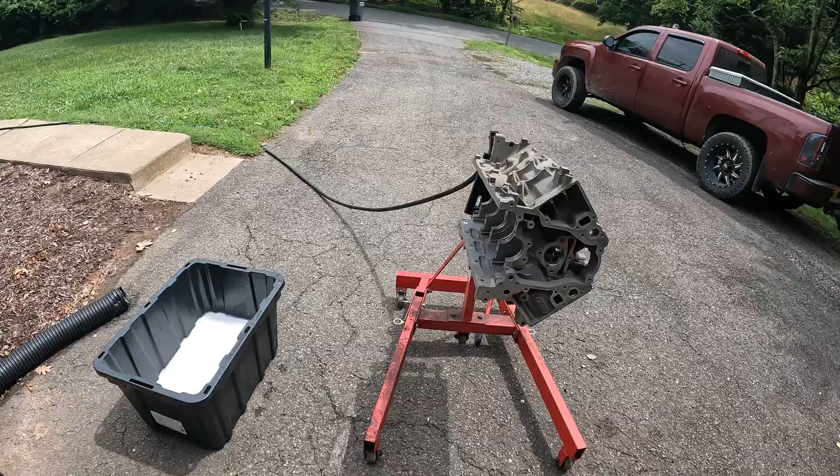So for starters, I have the block out here. I have a garden hose. In this tub I have water and a mix of Simple Green. I've already dropped the main caps in here, and like most of you, I don't have a big parts washer or something that I can just put the whole block into and turn it on and walk away. So I'm going to be showing you a cheap and easy way that you can do a proper cleanup and block prep on all of your parts, not just the block, on your build at home.

So like I said, we got the engine out here on the stand, got a hose ready, got a mixture of some Simple Green and some water. And for our cleaning, we're going to be using this right here. This is a Moroso 61820. This is a big brush kit, so I'm gonna pull them out of here. As you can see, we have a bunch of different size brushes. So we can scrub out all the oil galleys, we can clean the bores up and get all of the honing grit out of them. We can get everything nice and clean and ready to assemble.

Okay, so I got all the brushes out of the box here. Of course, you got some stickers. You got to have a nice sticker stash. You got to represent what you're buying. That's what everybody buys it for, right? We buy the stickers and we just get whatever we order, you know.

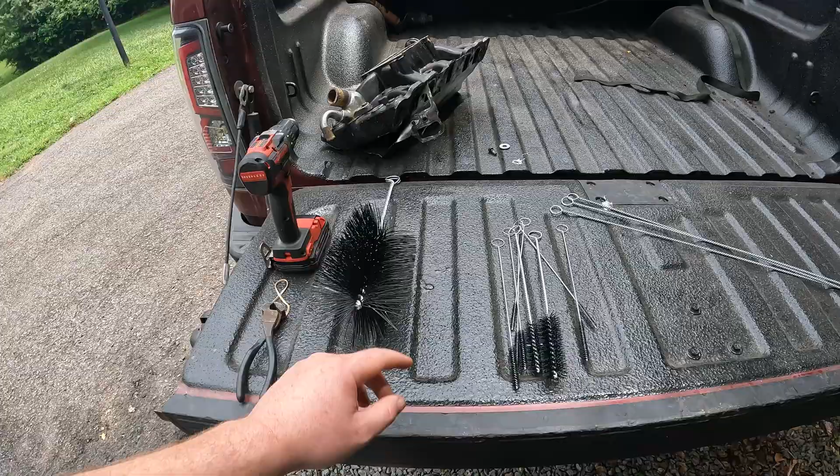So we have our bore brush right here. We have a bunch of shorter brushes, various sizes, so you can clean out all those small galleys. We have these nice long ones here, and we're definitely gonna have to use some of these because remember, we have that long main oil rifle that runs from front to back in the block, around the cam, and from the oil pump.

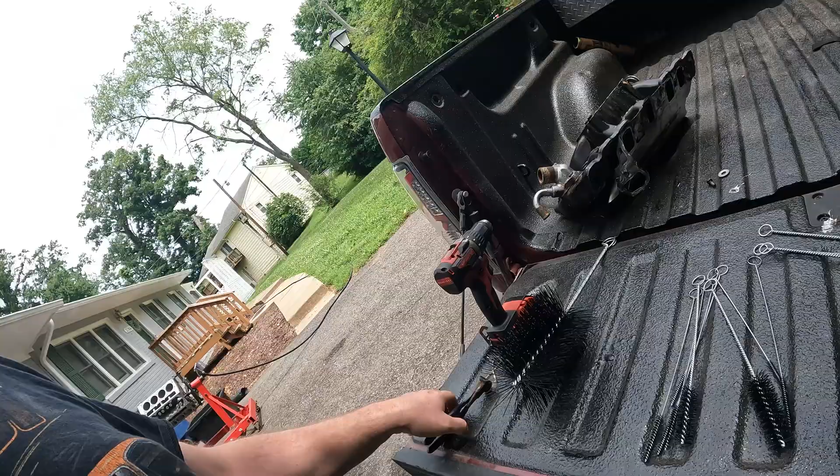And a little tip that I'm gonna show you here is these have a little finger ring end on them. If you want to make quicker work of it and maybe be a little more thorough with your cleaning, we got a drill right here, a pair of pliers, and I figure you can figure out what we're gonna do here. We're gonna cut those ring ends off. We can chuck that up in the drill and spin those brushes as we're running them in and out of the bores and all the oil drillings in the block here. So let's get started.

All right, so for starters, we're just gonna give the block a good rinse down. I've got the brushes over there. I got the ends cut off of them and we're ready to start cleaning. As you can see from last time when we were doing some modifying with all the oil drainage and the feeds, we have some chips laying down in there. So we're going to start with giving it a good rinse off, and then we'll hit it with the brushes and go from there. So ready.

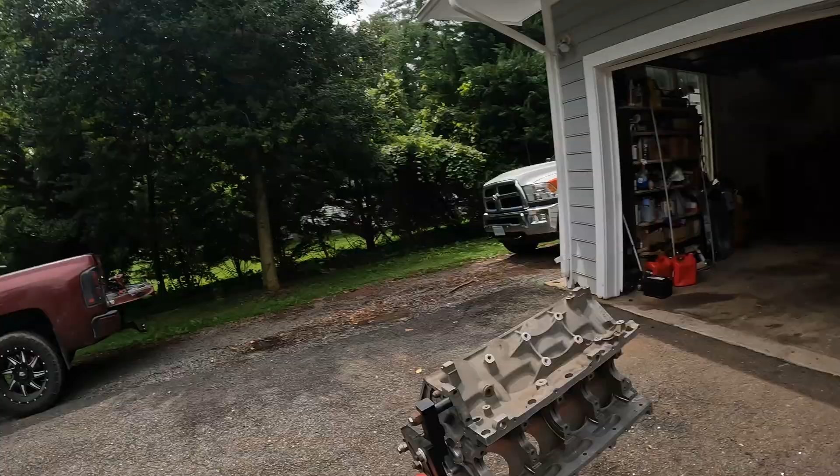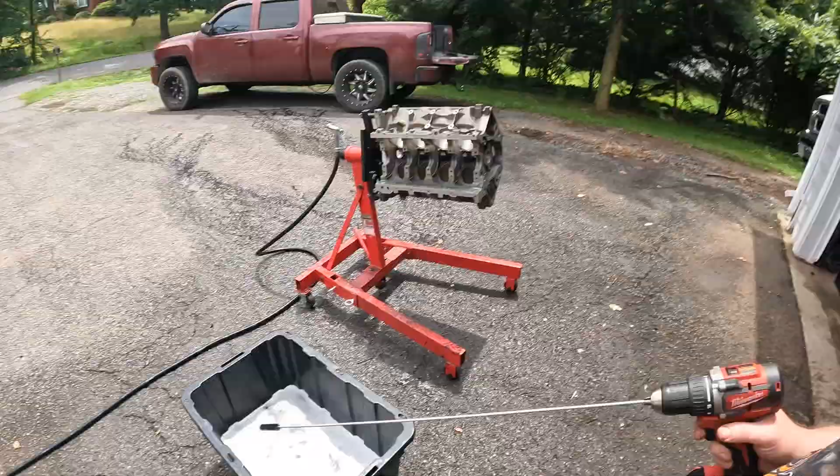All right, now we got a basic rinse down, got some of the big stuff out of there. We're going to start running the drill and the brush through it, and here's our setup. Looks kind of goofy, a little long, but it'll work great. So we're going to get some soap going on this thing, get it turned up, and start going through the drillings here.

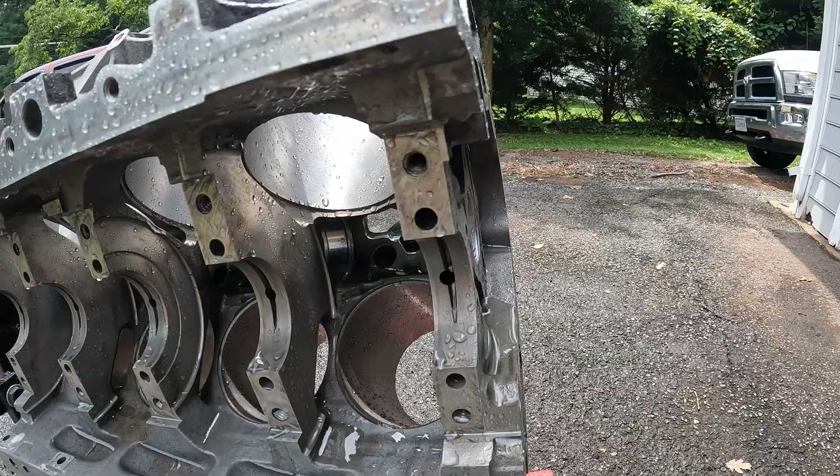You can see we've actually started knocking some dirt loose in there. So I'll put a little bit of a time lapse in here, keep doing that, and you can see what we're doing. And I'll get some more Simple Green in there soaking. Every hole we're gonna go over a few times to make sure we're knocking anything loose, especially when we go through these oil feeds to the mains. We could have had a little bit of dirt get in right there behind the cam bearings.

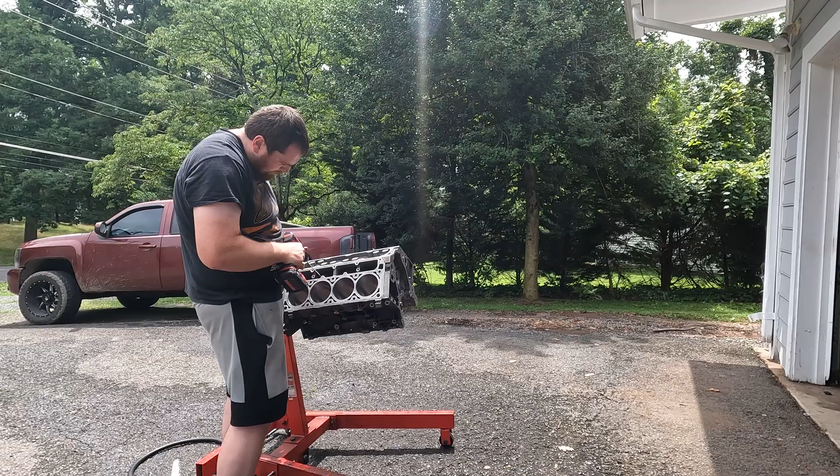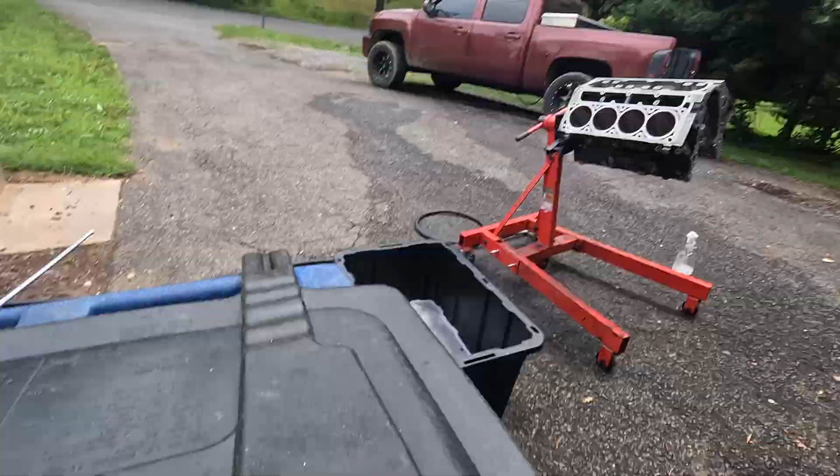Alrighty, so I've done a bunch of brushing as you've seen in the time lapse. So we've got everything fairly clean now. I'm going to give it a rinse and I'm going to look it over real good. One thing I am going to do too is I'm going to tilt this thing over on either side, and I'm going to show you how to make a quick thread chaser for the head bolts, because if you're not aware, you can even see some of it down in the hole maybe.

There is like a sealant slash Loctite that they put on the head bolts from the factory on these, and it will build up and kind of clog the head bolt hole, and it gums up the threads. So when you are trying to torque your head bolts, you can get an inaccurate reading, and sometimes that can actually make such a seal that you'll hear of people talking about the block popping when they're torquing those bolts. It's more than likely because they didn't get those holes cleaned out enough.

So I'm going to show you how to take an old head bolt and just cut some slots down the threads and kind of make a homemade thread chaser. We're going to clean all that out, flush them out really good, and clean all the head bolt holes up. I've already ran a brush through the main bolt holes, and I know those were nice and clean. They don't really put a sealer or anything on those, so I know those are nice and clean, and I've ran all the bolts in and out by hand, so I know that they're good and clean.

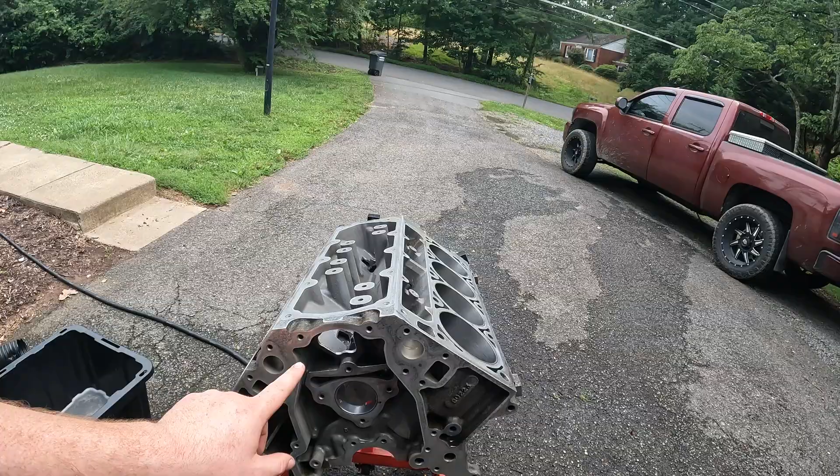If you have any bolt holes that need chased or cleaned, now is the time for you to go ahead and run a thread chaser or a tap through everything, clean them all up. This one came apart really good, everything's clean, so I should be pretty good once I just flush it with some water and some air again.

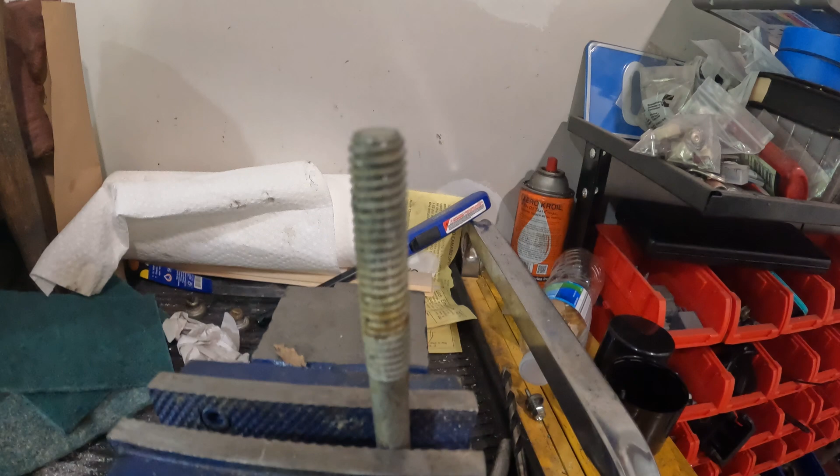Alrighty here guys, I got a head bolt stuck up in the vise here. You can kind of see some of that slimy stuff, that goop that's on the threads. That's some of that thread sealant I'm talking about, and you know, it mixes with the coolant and everything. We can take it out. So what we're gonna do, got the old trusty Milwaukee here with a cutoff wheel, and we're going to cut probably just two of them. We're gonna go this way up the threads and just cut a slot.

And what that's gonna do is, as we're running down through there, just think of it like a tap where you have the slots cut in between them. That's all we're doing, is making a thread chaser with this and just allowing the edge of those threads to kind of cut and clean all of the sealant and Loctite out of those bolt holes. So we're gonna go ahead and do that real quick, and we'll go over and get the block cleaned up the rest of the way.

Alrighty, so I have the slots cut in it. I just cut two. Try and cut it the full length of the thread so you make sure that you get everything. Now be careful. Yes, I'm going to use an impact, but I'm going to run it on low. Don't just try and burn this thing down through there, because you can damage the threads if you're being too aggressive with it. So just be light.

If you don't feel safe using this or an impact of some kind, just do it by hand, but make sure you run it all the way down. Now don't try and burn the thing in the bottom, because you will bottom the hole out and you can damage the block, pull threads out of it, whatever.

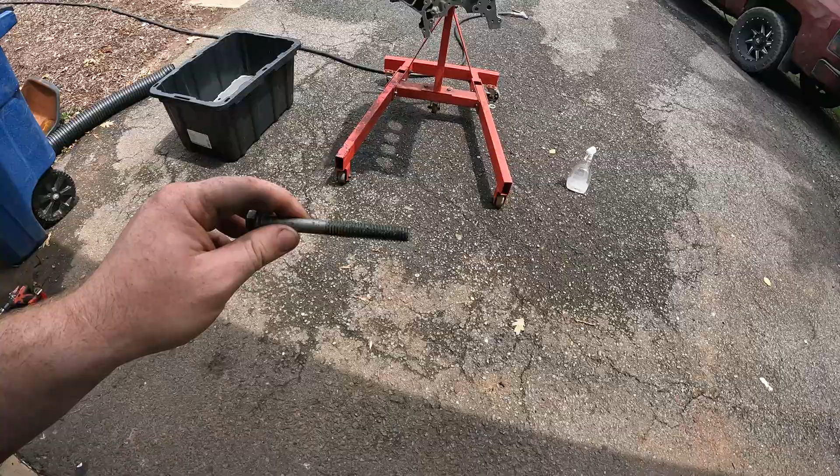Okay, so you can see some of the dirt and junk that comes out of those holes, and so just make sure you get all those nice and clean. We're going to give this thing a good rinse job afterwards, and we'll be all good to go.

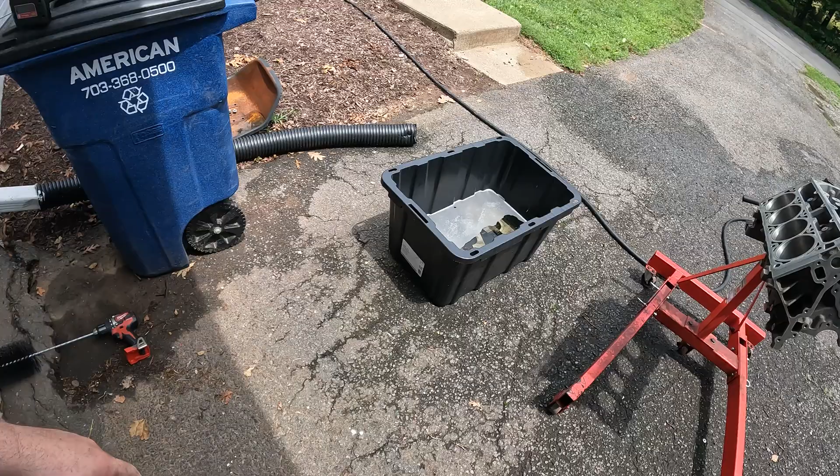And so just for FYI, you might have heard it kind of bumping on the bottom, but I only have this thing, I don't know if you can see the light, set on like the super low, and that runs it down to like 5-10 foot-pounds at best, and it'll only hit 10 if you sit there and like bump it. As soon as it hit and started jiggling, I stopped, back it up, run it in again.

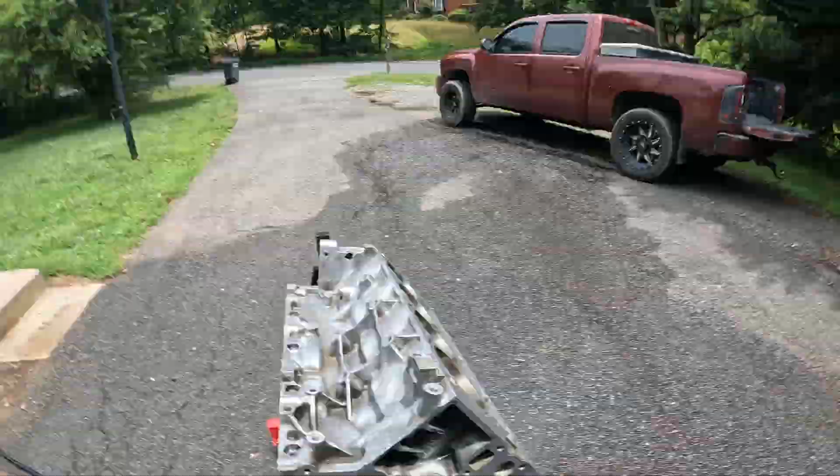Alrighty, so sorry for the noise. That's what I got to work with. It's noisy, but I decided to go ahead and do some wire wheeling and clean this off, because in the next video we're going to be painting this engine, and hopefully it turns out really good. I hope y'all like it. I'll give you a little bit of a hint, but we're going to be kind of keeping the theme going here.

So getting this thing blow dried, you can already see we're starting to get a little bit of flash rust in there. That's not that big of a deal. That stuff's so light, if you just wipe it with a rag, it'll come out.

Try to do this on a cool day if possible, and I actually recommend you not use hot water. Reason being, it dries quicker. That block will soak up all that heat. It'll dry quick. You'll get flash rust almost instantly. As you can see, I'm sweating. It's about 90 and it's pretty humid today, but we got to do what we got to do.

All right, we got the rods and the main caps. I already sent them through the bath, got them all cleaned up. I've cleaned the bolts up. We're not going to be reusing those. I got new ones, but I am going to be using them at least for the part where we're going to install the mains, check all the main clearances and all that stuff. I also have new rod bolts. They're just stock replacements for everything.

I didn't really feel the need for this engine to spend the money on ARPs. If I was spending the money on ARP rod bolts, I'd probably just put an aftermarket rod in it, because by the time you put a rod bolt in it and have them resized, you could have bought aftermarket rods. We really are not going to a power level that's going to necessitate main studs from ARP or anything like that.

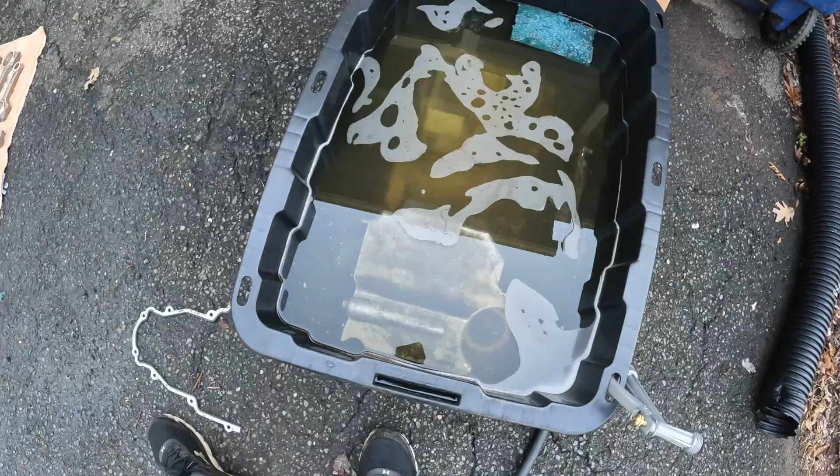The oil pan, I got the windage tray, I got the front cover, I got all that kind of stuff in there. Valve covers, rockers, all in there, going for a bath. I won't bore you much with that. I'm gonna go through and just get it scrubbed up, clean, and then we'll be ready to go with assembly on parts.

The crank is in here in the bag, so it's already pretty clean. I'm not too concerned with it. I am going to just take some of those brushes that I got, and I might show that real quick when we're getting ready to set our clearances and actually install it for good.

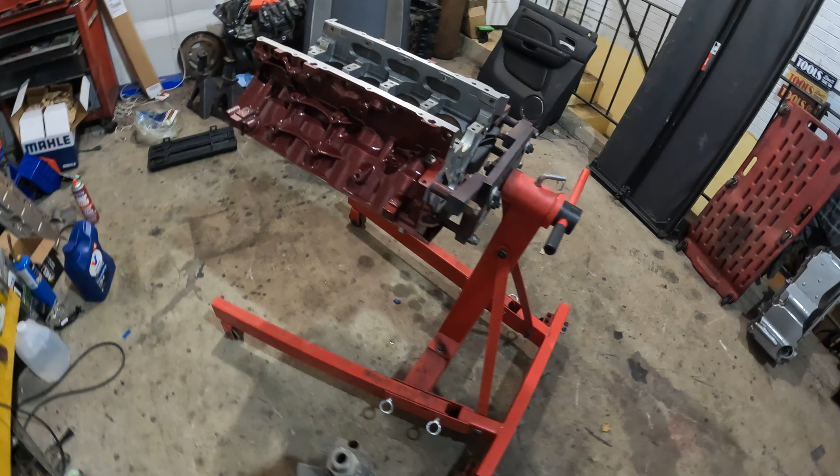So what I've done already off camera, as you can see, this looks a little bit different than when you saw it last time. I got everything painted up nice and pretty. After I was done cleaning it in the last video, I tried scuffing and doing some cleaning on it, and I just wasn't happy with how it was coming out.

I figured, hey, it's out, and I feel like I did a poor quality job if I just put it in as it was with dirty grungy aluminum, and I wanted to clean all the corrosion off of it. It just wasn't turning out very good. So what I opted to do was go ahead and sandblast the outside of it and clean all the parts up. So we did the valve covers, valley pan, oil pan, the heads, the block. Most of the big parts are done.

So I went ahead and sandblasted, and unfortunately that led to me having to re-clean the block again, as I showed you before, but at least I know it's nice and clean this time. It's been cleaned twice, so I just wanted to make sure we didn't get any sand from the sandblasting or dirt or anything like that back in it. So I did a full clean job just to be safe. So now this is what we're left with.

If you can't tell, this is the same color as the truck. I had some paint left over from some previous repairs on it, so I had the same red and I had some clear coat left over, and I chose this gray on the oil pan. This is on the oil pan, on the valley cover and the valve covers.

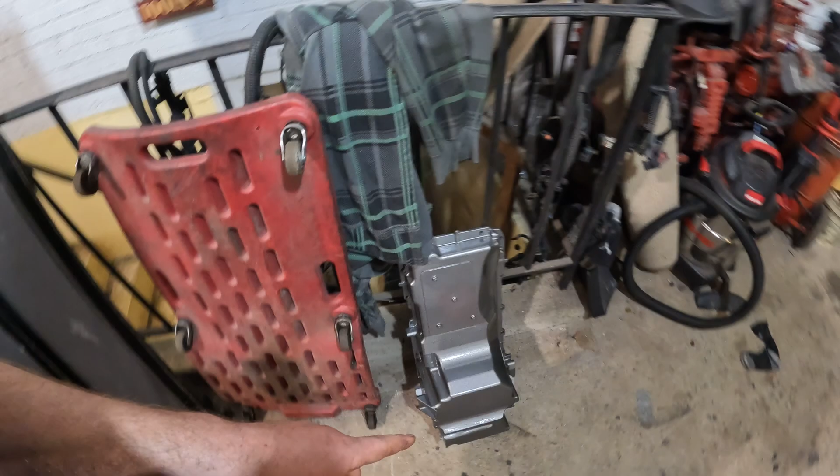So I went ahead and went with this color, and everything is primered, painted, and clear coated, all with automotive grade stuff. So this should last forever, should last good. Hopefully we don't have any issues with it like peeling or cracking from the heat later.

Some of the guys on Roadkill, Dulcich and Freiburger, swear by this stuff. Doing automotive paint, it's my first time doing it. I've done a couple rattle can jobs with some Duplicolor engine paint, stuff like that. Doesn't seem to last the best, so we're gonna find out if this lasts any better, stays shiny, looking good. So that's that. In this part, we're going to be getting the bottom end set up.

So I've done a lot of painful stuff kind of off camera here. Things that I'm not really gonna get into too much just because I didn't have the time. I was doing a little here, a little there, and it was really sporadic. So we went ahead, we measured the cylinders and made sure that they're pretty square. I got a couple ten-thousandths variance. They're all pretty straight. The hone job is pretty good on it. So I got that all checked, measured the skirts, pulled all the rings off the pistons, measured the ring gaps, made sure we're all good on that.

I just set the crank in, and I know I'm going to catch some flack for this, but I just Plastigauged it because I wasn't super confident in my micrometer setup that I have right now, getting the dial bore gauge straightened out. So I didn't feel like dealing with all that. This is a stock crank that was polished, and I just put stock replacement bearings back in it, so it shouldn't be that far off, and it's not.

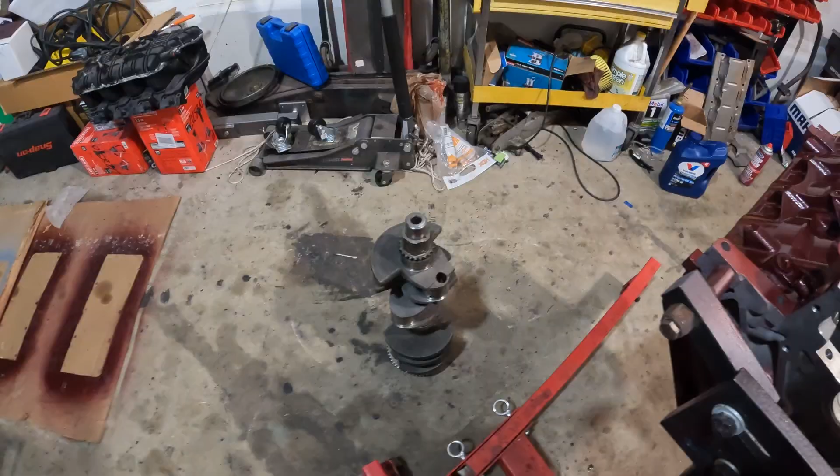We're about 2 thousandths on the mains. The front two are a little tighter, like 1.8 or just a tick under 2. So I'm pretty happy with that. I figured this thing was going to be a little looser than that, but I'm not mad about it. The crank was polished and stuff, so went ahead and checked that. Got it all lubed up.

We're going to drop the crank in, torque the main caps, we're going to put new bolts in it before we torque it, and then we're going to start assembling rods and pistons, get those in, check the rod bearing clearances, and then we're going to keep going together with it. So this video is mainly just going to be some bottom end assembly and sticking the cam in, a few things like that. So we're going to get this crank stuck in there, and I've been wanting to try one of these. So now you see it like this.

So got the crank in. Had to kind of take a pause because for some reason I was struggling to get one of the caps squared and set in there. Kept binding up on me, so we just had to take a pause on it and take it back apart, figure all that out. I think I just wasn't getting it to seat right in the block. I always tap them into place and stuff, but for some reason number 4 was just struggling seating itself in there.

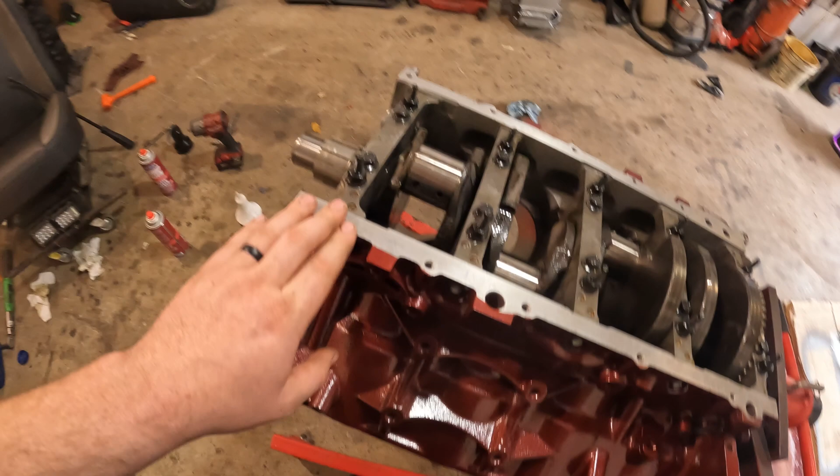So anyway, we got it in here, got the caps all torqued, got the side bolts in and torqued. I put a little bit of sealant on those. These are new main bolts. These are Summit's, they're GM replacement bolts. So I got them in there.

Also when you set these in, make sure that you take a dead blow or rubber mallet or whatever and tap the crank forward and back and get your thrust seated properly before you go ahead and torque this one. I already went ahead and checked. We got 4 thousandths end play, so we're perfect on that. So now we're going to get on to building rods and pistons and getting those installed. As you can see, once you got it all assembled, it should spin nice and easy and free. So on to the next thing.

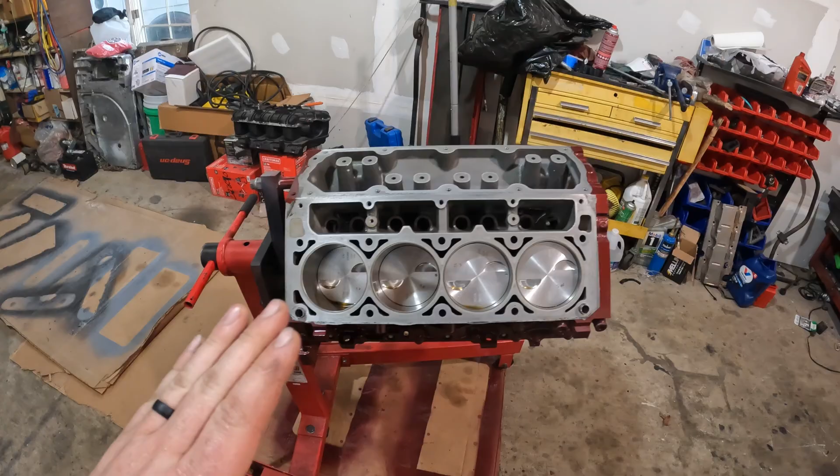All right, so in the last part, we got the bottom end together. All rods and pistons are in, bearings are all checked, crank's in, everything rotates nice and free. We checked the ring gaps, checked the bearing clearances, everything's good. So next part, we're going to be getting into a little bit of the meat and potatoes of this video, and that is camshaft, and then we'll be getting into cylinder heads and the valve train setup, because that's where we're going to make some power with this thing.

Not going to set any records really, but that's how we're going to bump this thing up a little bit from a stock 6.2 to something that's going to make a little more power. So let's get started. So here's a few of the parts we're going to be starting with. I have a phaser limiter we need to install. I'll go over that. New cam retainer plate.

Always replace these. They got a seal in them. That seals that front main oil galley right here. So make sure you replace that, because if that gasket's leaking, you're going to be oozing oil. So that needs to seal. I'm also going to modify this a little bit by drilling a pinhole in the one side here to add a little bit of oiling for our timing chain.

Reason I'm doing that, and the reason I think that you should do that, is we are running higher spring pressures, we're running a faster ramp and a higher lift on the cam. There's more load on the timing chain because it has to overcome all that, and we are going to be putting more tension on the chain. Being that I am keeping the VVT in this engine, obviously, since I said about a phaser limiter, we are limited to running just a stock single row chain. We can't upgrade to, say, an aftermarket double roller or anything like that.

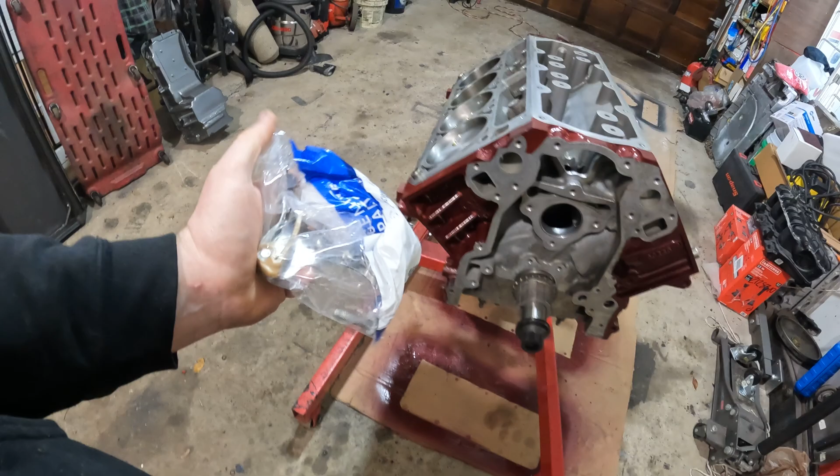Also, I feel that you should probably keep the stock style leaf spring tensioner if you're running VVT. I'm not saying that you have to, but I feel like you should. GM did it for a reason, and I'm not trying to be one of those guys that think that the factory did everything the best, because there's plenty of things they could improve on.

But the reason that I say that is when we're targeting our cam movement with the VVT, a little bit of slack in that chain, and I know it's not much, but you can get a degree or two of deflection back and forth on that chain and kind of make the VVT hunt, I think. So I feel like you should keep the stock style tensioner and not go to like the LS2, LS3 style little block in here, because that'll still let that chain slap a little bit. This will keep a little more tension on it and not let the chain wander around as much.

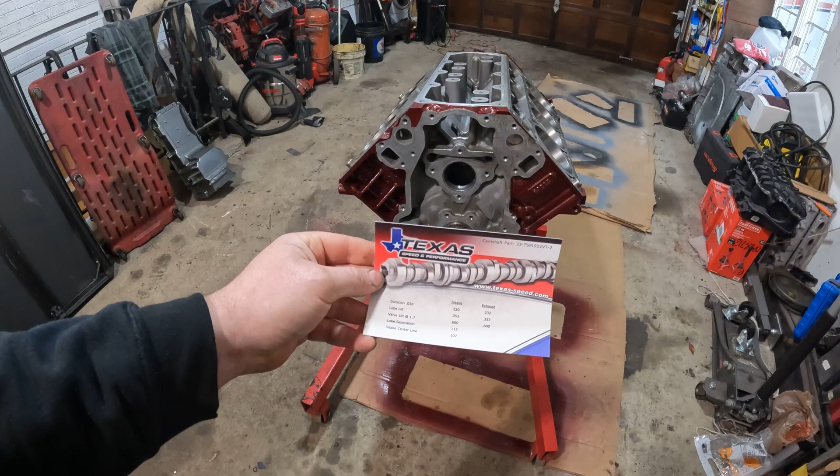So anyway, that's that. And obviously, like I said, I got a new chain, a new GM replacement, and I'm going to be replacing the cam bolt just to make sure that everything's working right with our cam phaser. And now I won't hold you any longer, and I got the cam card out, and we'll show you what we're putting in this thing. It is a Texas Speed cam, and like I said, this is a VVT cam, so this is their L92 VVT stage 2 camshaft.

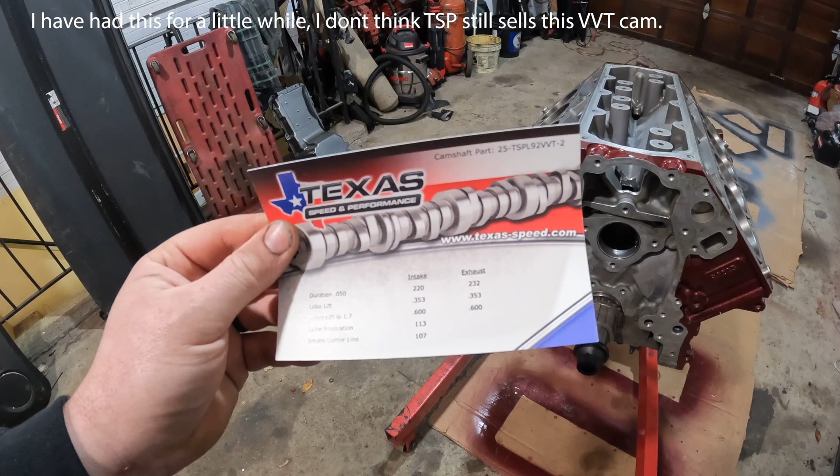So it is a 220/232 at .050 duration, and .600 lift at the valve, 113 LSA, and a 107 intake centerline. So I'm going to talk about that a little bit here, and problems that I have heard of and seen people have issues with when they deal with VVT, and they're like, I'll just delete it.

Without getting too in-depth into it, your cam timing makes a big difference on where your power band is. In general, I'm not saying this is always the case, you can go too far, but in general, the more you advance the camshaft, meaning the sooner that you close the intake valve so you capture more compression, the more low-end torque you will have.

Now you can't go too far with that and go beyond that point that you're making any more low-end, but then as RPM comes up and you're trying to make more top-end, shift through the mid-range, you can retard the camshaft a little bit and make it meet the needs of the engine better. So it gives you a little bit broader power band, and the reason I'm doing that is I'm trying to retain as much low-end torque or gain as much low-end torque over the 5.3 as I can with this 6.2. That's why I went fairly mild on the camshaft. I'm kind of riding the edge of what I would put in something on this kind of application.

Trying to make it have a good overall power band, pull decent on the top end, but still have good drivability, good low end mannerisms, good torque, not need a big stall converter, stuff like that.

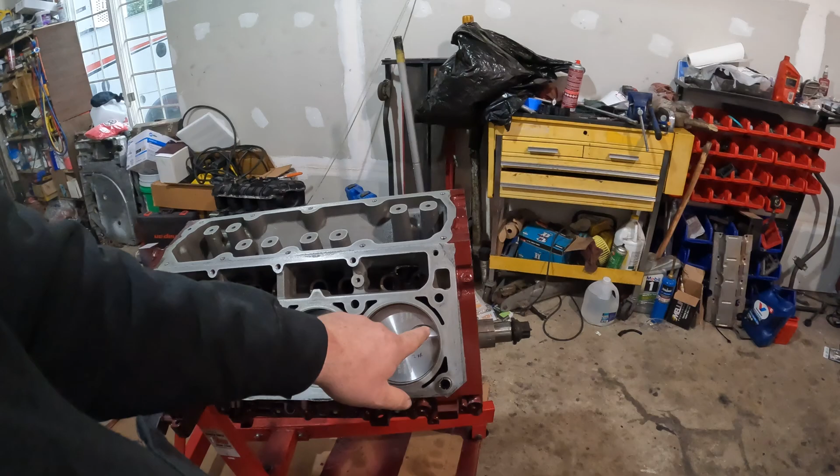With a larger camshaft, more duration, more lift, mainly the duration side, you can run into a piston to valve clearance issue if it retards too far, and you're mainly going to see it on the exhaust side. So when your piston's traveling up, exhausting all the air, if the valve closing point is too late on the exhaust side, the piston's chasing that valve up, you will have a piston to valve clearance issue and you will hit your exhaust valves and bend them.

So that's just a little tidbit when you get into these later LSs that have VVT. That's why I specifically have these pistons in it. I didn't go for an LS3 flat top, because I wanted to retain my VVT. I needed to put a piston back in it with valve reliefs on the exhaust side so that we didn't have a piston to valve clearance issue. So anyway, that's enough of that. I'm going to stop rambling and we'll go ahead and get this cam phaser limiter put in, and then we'll move on.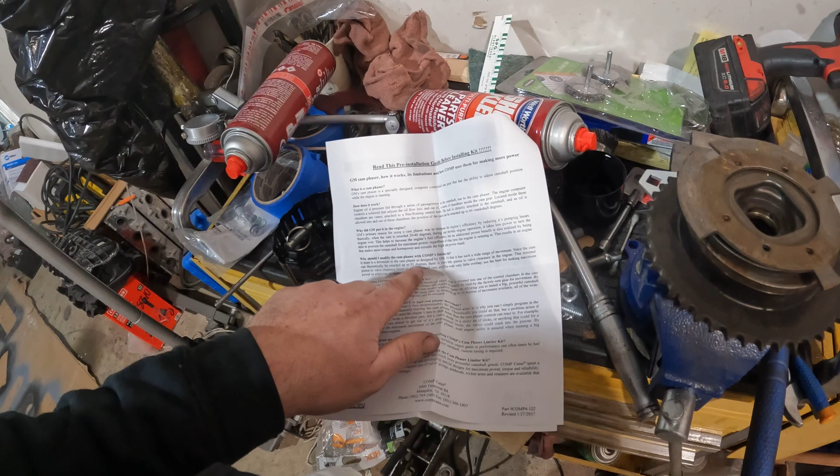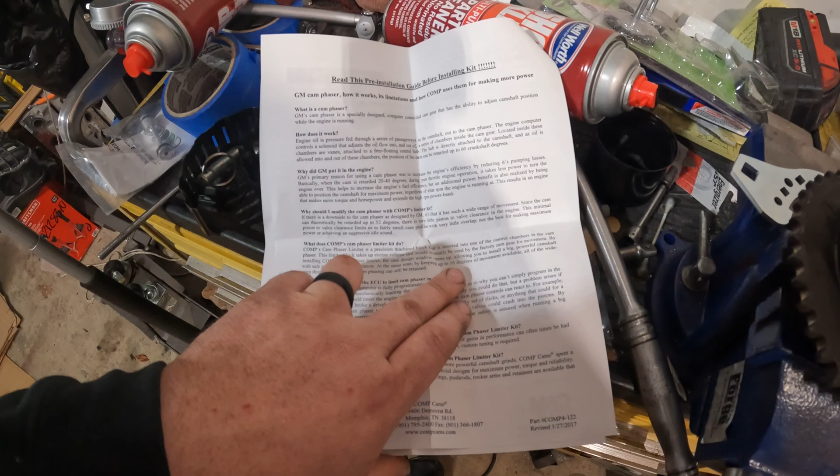Okay, so real quick, just to show you what I was saying. Yes, the cam can be swung up to, if you read right there, about 52 degrees. So that's a lot of swing, and we move it with this phaser limiter to about 16 degrees. So you still get plenty of movement from full advance to retard to make it make power. You just have to limit it, because if you leave that 52 degrees, you're going to bend valves.

And then this is Comp even telling you right here on this page about the two different phaser limiters, which unfortunately I believe I have this one. I'll measure it when I get out here. There's part numbers on it too, but mine's kind of dirty.

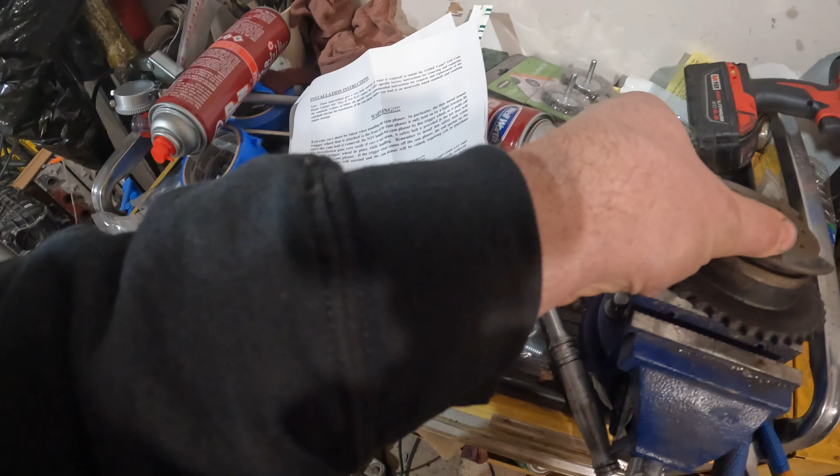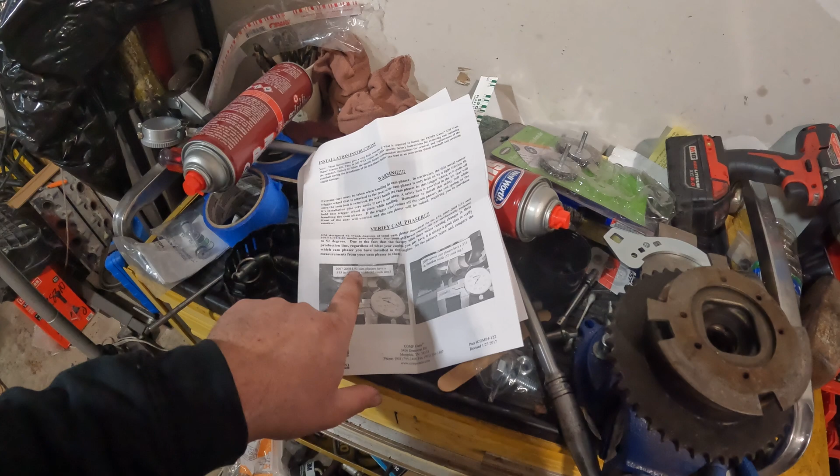But anyway, I've cleaned it up, but unfortunately I got a little bit of residue, and it kind of looks like surface rust, but it's like slime from sitting in the soap for a while. It took a bath too long. But anyway, this came out of an 07 Denali, so this is probably going to be an 07, 08 L92. So I'm probably going to have the wider cam phaser with a little bit more movement in it. We'll find out when I take it apart. So we'll follow this, take it apart, put our limiter block in, and put it back together.

Okay, so I'm going to give you kind of a dumb moment here. When I cleaned this engine up, I showed you the whole Simple Green bath, all that stuff. This thing had a lot of varnish on it, and my stupid self didn't really think about this, but there were open ports into the chamber in here, and we got a lot of gunky buildup. I've tried cleaning it out, but obviously we got this thing completely blown apart right now. I kind of don't even want to use it. So yeah, don't submerge it in a water bath. Parts washer, clean the varnish off with brake clean or anything like that. Don't let it sit in a soak and be stupid like me.

So I'm gonna look around. I had another cam phaser around here out of a 6.0. I'm not sure if it's gonna work or if I can even find it. We might just take a break, and I'm gonna go ahead and slip the camshaft in and put the front tensioner and the front cam plate on there, and then I might resume trying to find my other phaser, or we may just order another one at this point. I don't know. Oh well, live and learn. Could be worse. At least I actually took it apart and realized that and didn't put it on the engine like that. So learn from my mistake. Don't be stupid.

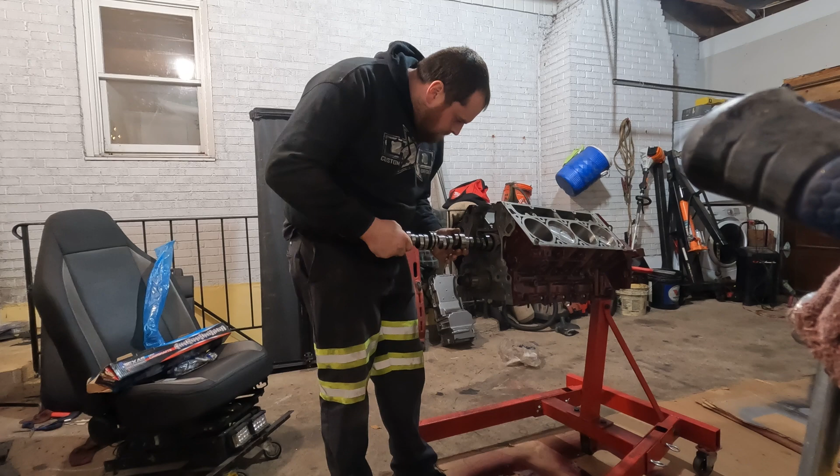All right, so cam's in. I don't have the back plate on yet, so I gotta watch that I don't knock it back and it tries to slide out the rear. Also, if you've noticed, and you may have a heart attack on this, I have a little bit of this left over. Some gear oil. I know. This thing's gonna get an oil change virtually immediately. It's gonna fire up, run a heat cycle, drain it, put a new filter on it, put new oil in. You should do that anyway when you're doing a refresh like this.

I could use an assembly grease, but I just don't want to use something that thick and heavy. In the event that this engine doesn't go in immediately when I'm done building it, some of the greases can kind of set up, and I don't want to take a chance clogging any of the oil passages if this thing sits around for a few months. I know it sounds dumb, but I have heard of some of these thicker grease assembly lubes actually drying out, and I really don't want that. So when this thing goes in, it will be getting a full pre-lube, and I'll show you that. We're gonna either modify a fitting or get a fitting right here, and pre-lube it when it goes in the truck and have oil through the whole system, so everything will be primed with engine oil ready to go.

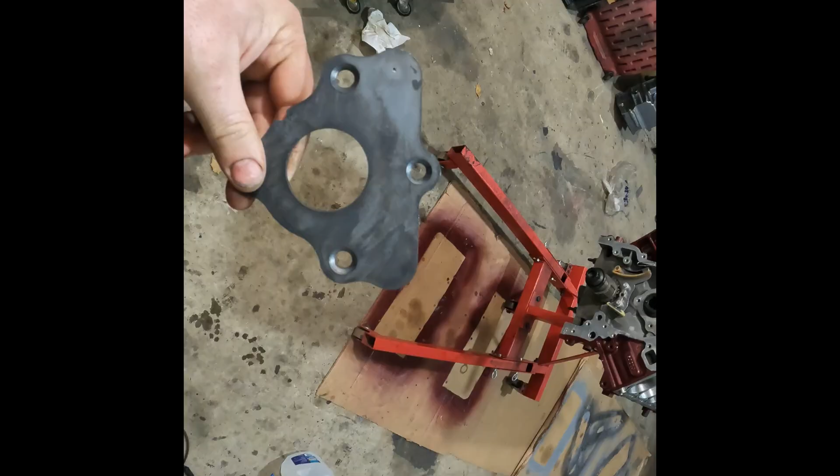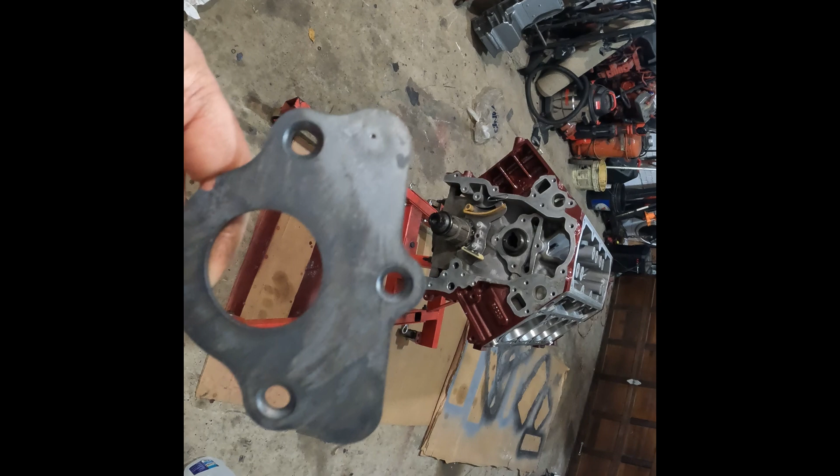Okay, got our cam retainer plate here. I went and drilled just a small hole in there. It's a 1/16 inch hole. I put it on this side specifically. My reasoning was this is the slack side of the chain, so if I get the oil spray over on this side as it's pulling across this way, it should help load the chain up with oil to help when it's being pulled on the tension side, rather than spraying it while it's on the tension side and pulled tight. That's my theory anyway. Whether it works or not, I don't know.

But this will help with chain lubrication. Like I said, this is only a 1/16 hole. I'm not worried about that causing much as far as oil pressure issues. We have a high volume pump, all that stuff. And also the reason I chose high volume for this, the clearances in it are not that loose.

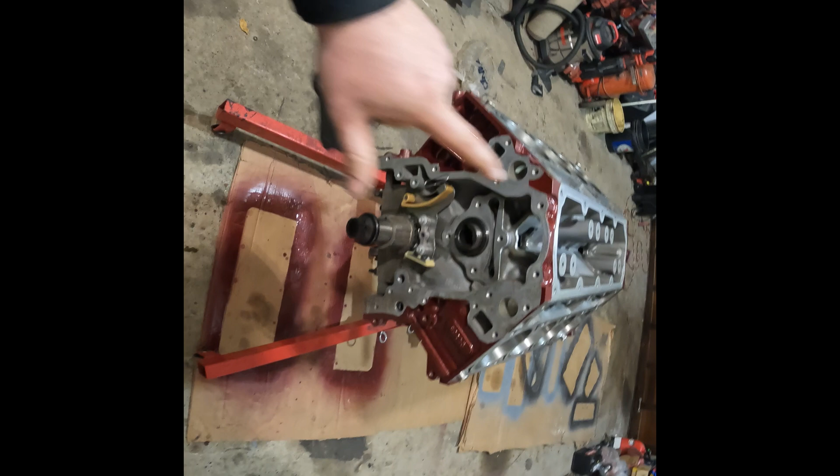The reason I chose it is because GM puts higher volume pumps on VVT engines because the cam phaser requires more oil flow. So they don't have a low oil pressure condition, they put a higher volume pump on, and this little hole right here is not going to be a big deal. It's just going to help add a little bit of lube to the chain. So we'll go ahead and pop that on there, and I will hopefully be able to find this other cam phaser, or I'm going to have to order one.

Anyway, okay, so picking up where we left off after my stupid mistake with not getting my other phaser cleaned out properly, we just went ahead and ordered a new one. So this part number is the late part number. The engine had an early one in it. I did some searching, and I think I should be putting the late one in it actually, because a lot of the cam manufacturers now recommend if you have an early part number that you buy a later one. Depending on who you get your cam from, that may vary.

So anyway, we're gonna break this one down, put our cam lock in it. This is the later one that the directions tell you has less retard in it, like 52 degrees instead of 60 something. So I'll break this one down, put the block in it, or the limiter, and we'll put it back together, and then we'll get this cam degreed and make sure we know where we're at.

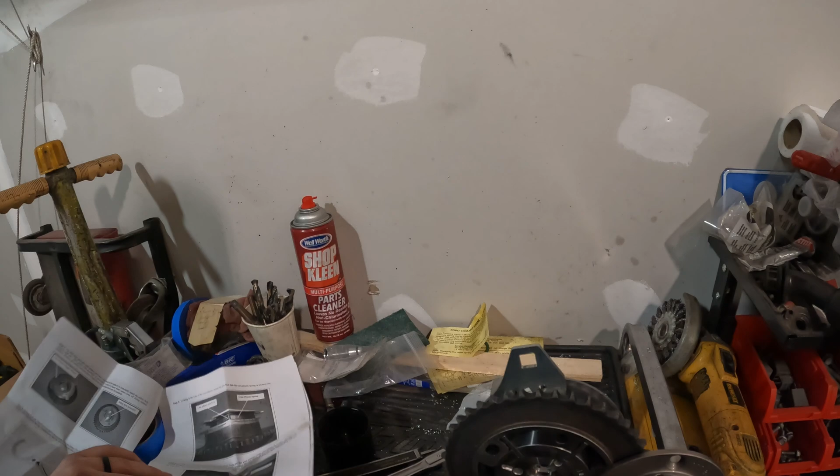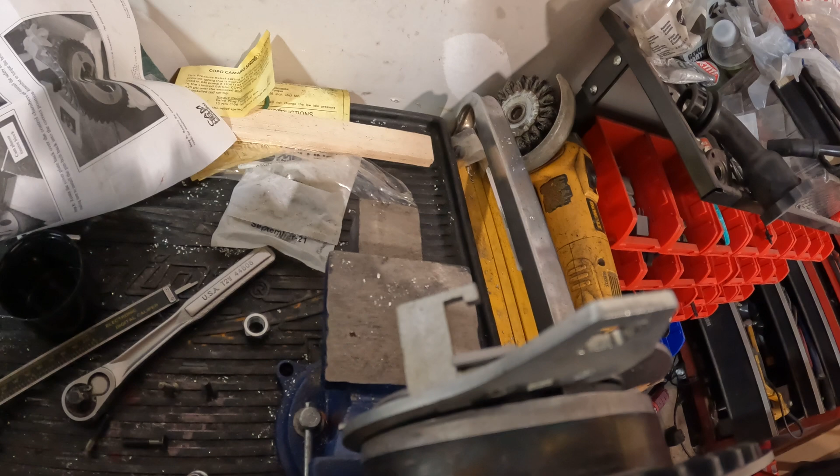Okay, so we got the phaser split here. I'm gonna make one complaint. If you read the instructions and you look at how this cam phaser lock is supposed to work, and I ran this on the other one, I just didn't say it, I guess. If you look at the instructions, you see right there how the lock piece is supposed to actually, there's teeth that come through it. Well, this looks very sketchy, trust me. Don't do it like I'm doing it, because if this thing snaps, it's gonna hurt your fingers.

But the depth of the cut on my lock piece is not deep enough. It will not go around the tone wheel and through this turning tool and actually lock in the teeth. There's not enough gap right here for the teeth to actually come all the way through. So that's just where it wants to stay. I'll leave it there. Keep your fingers out of the way. Don't be dumb like me. So anyway,

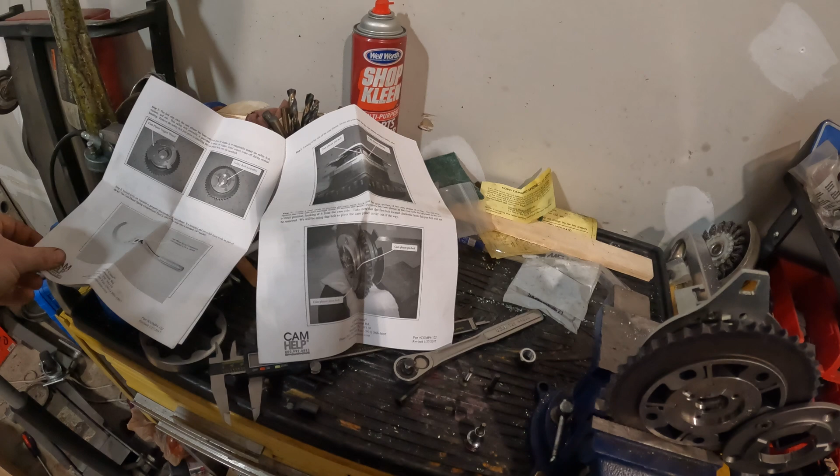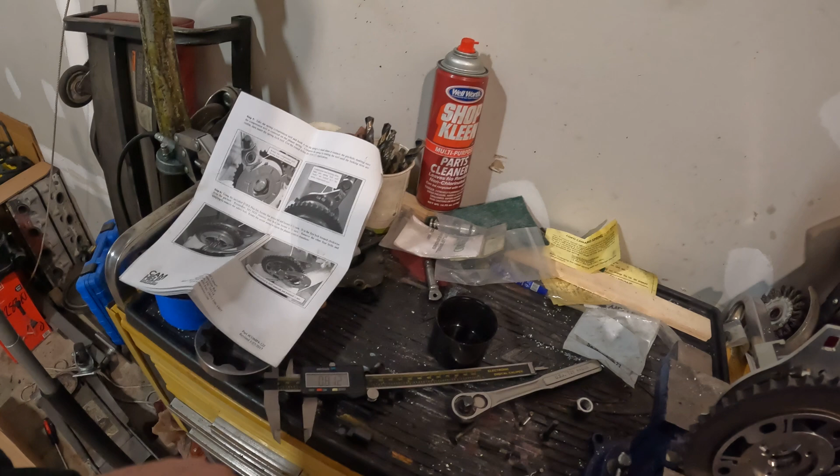I got it opened up here, and if you do the quick measurements like they say over here, obviously I have the later one now because I got like 812 thousandths, just a quick measurement with the cheapo calipers right here. So I know I have the later one with less movement. So we got it opened up, we're all good. Make sure this is nice and clean before you put it in there. And put your cam phaser block in your cavity, put the back of it back on, make sure you put your lock bolt in so it doesn't fly apart, and you're good to go. There's really not much to it. Just follow the directions.

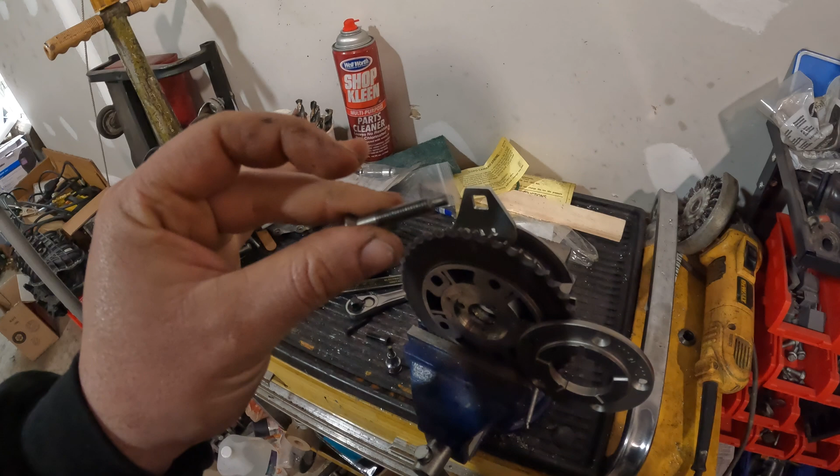So real quick note, I put the block in, make sure you put it in, there's a ledge. If you follow the instructions, you see the ledge goes toward the inside on the phaser block. The ledge right there goes in. And also make sure you pull the right bolts out. The bolt that goes right here, they call it the pin bolt, in this hole. It's different than the other ones. They call it the pin because it has a tip that is longer, it sticks out, and it grabs that spring that forces the phaser into full advance, whereas your other ones don't have that. So make sure that you pull the right ones out.

It says the one clockwise of that is your pivot bolt, to just slide this out of the way. They do that because they're trying to be safer, because they know that if this spring unloads or if this thing pops apart, then you're gonna go, how do I put all the pieces back together? So just make sure you unload it correctly so you can get this pin bolt out and leave the pivot bolt in there. It's just a little tidbit. So we got this in, we'll put our bolts back in, and we're all good to go, ready to start timing the cam on this thing.

Okay, so as you can see here, we got the phaser on, chain in, all that stuff. So I'm setting it up to degree it and make sure that we're at where we need to be. So this is a Comp Cams degree wheel kit. This one's supposed to be specifically for an LS, but I mean, it works for just about everything if you can adapt your tower to get it bolted up somehow.

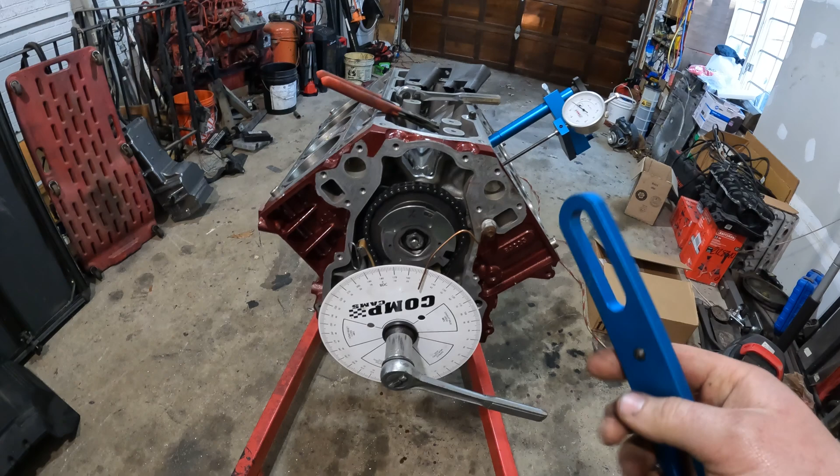So anyway, step one here, I'll just kind of run you through it rather than forcing you to sit through this. So how I'm doing it, you can do this other ways. You can do it with the dial indicator if you want, or you can use the piston stop. The other way, you can do this with the heads on. You can use a piston stop in your spark plug hole. A couple different ways of doing it. I'm just showing you how I'm doing it right now.

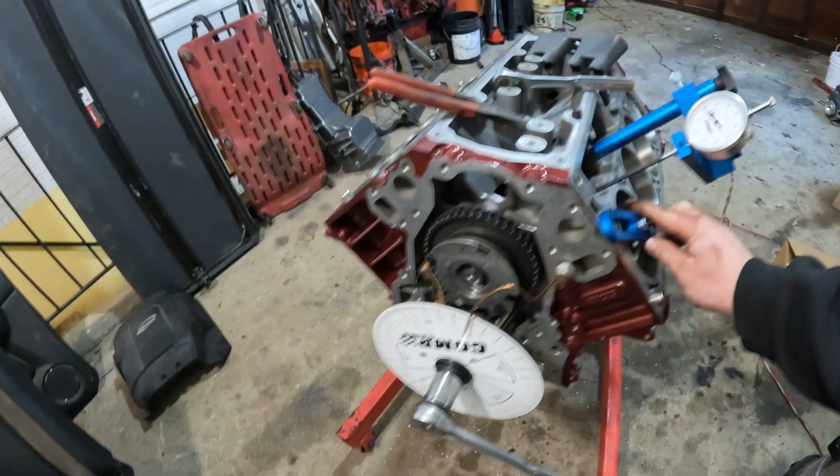So take your #1 piston, and they supply you with a couple of head bolts and spacers. Bolt that on, run your stop down in a little bit here, and roll it till it stops. Roll it backwards the other way till it stops. Make sure you record the numbers and split the difference. And if you leave it on your stop, you would have to take that number, whatever the difference is. And in my case, it was 30 degrees. So 15 degrees. So whichever way you had it rotated, 15 before top dead center, 15 after, whatever. Remember, engine spins clockwise, viewing it from the front.

Set it 15 degrees either before or after, whichever way you had it rolled up to stop, and tighten your degree wheel down, and then just do a quick verification of your 0 again. Before you take this off, make sure that you were 15 before and 15 after, and tweak your needle here a little bit and make sure that you get it zeroed where you have actual true top dead center. That is key to making sure your cam timing is correct. You need to take your time and set true top dead center. After that, it's not that bad.

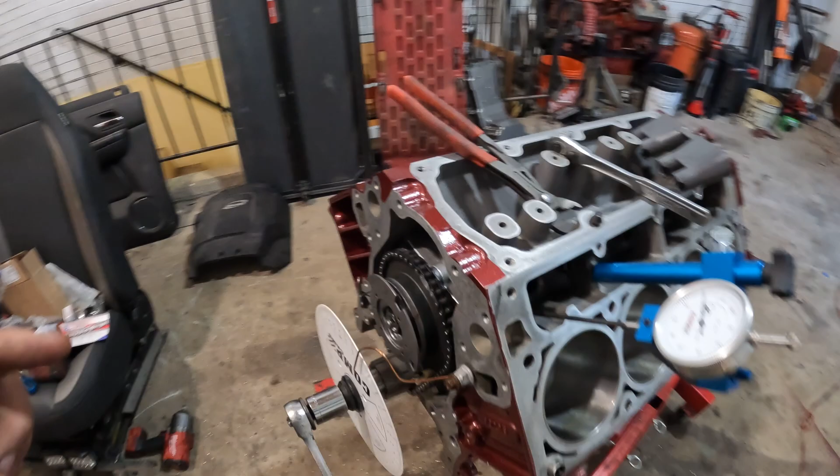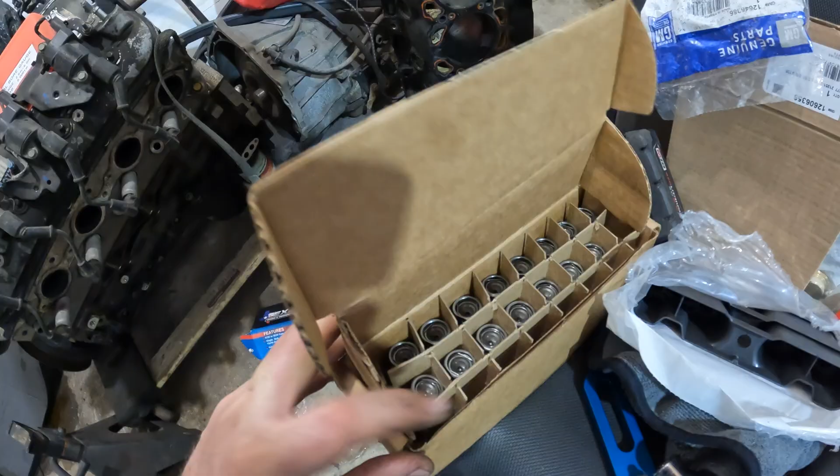You'll set your dial indicator up here, and you'll set it on your #1 intake, which is going to be the front one on this side. Your exhaust has your relief. That's the easy way to tell on this VVT engine. I like to set it on the edge of the lifter, so then you don't have any chance of it riding in the cup weird and skewing your readings. If you put it on the outside of your lifter, meaning this ledge right here, not in the cup where the push rod sits, then there's no chance of your readings getting skewed. So luckily for us, I went ahead and did that.

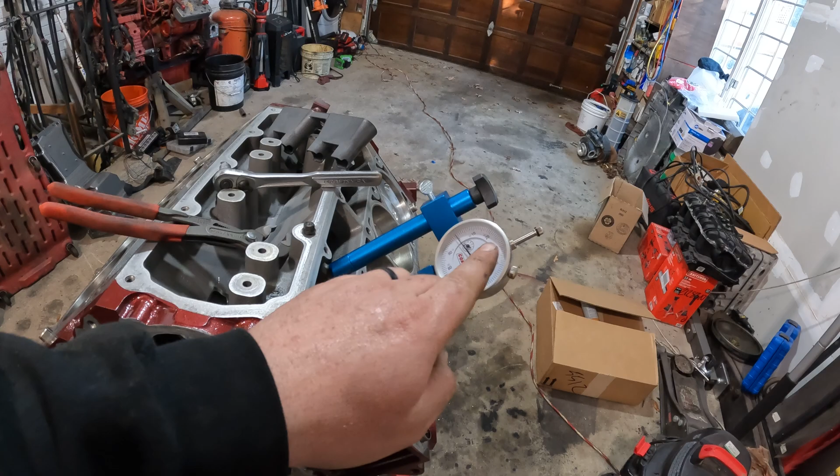So then what you'll do is I took 50 thousandths, actually it was about 53, because 353 on my cam card right here is your lobe lift. You get your 600 lift with your rocker arm multiplication, which is 1.7 to 1 on an LS. So 53, 52 and a half, somewhere in there is where my thing was. So I set my needle to 0, I roll it up to peak lift, and then I go from one side of the lobe to the other, down to my 0 mark, which is 53 thousandths.

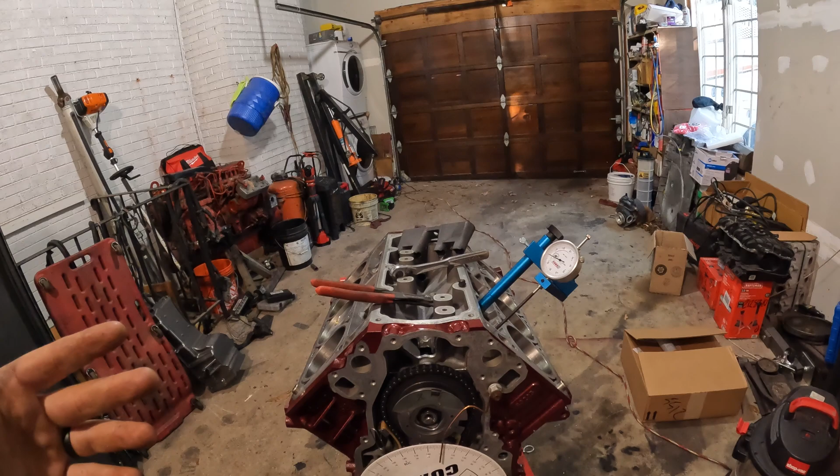Some people will tell you to do 50. Some people will tell you to come 50 off of the base circle. You can do it however you want. There's multiple schools of thought on it. It'll get you the same results, is the point. So then, in my case, I had 150 and 65 and a half were my numbers.

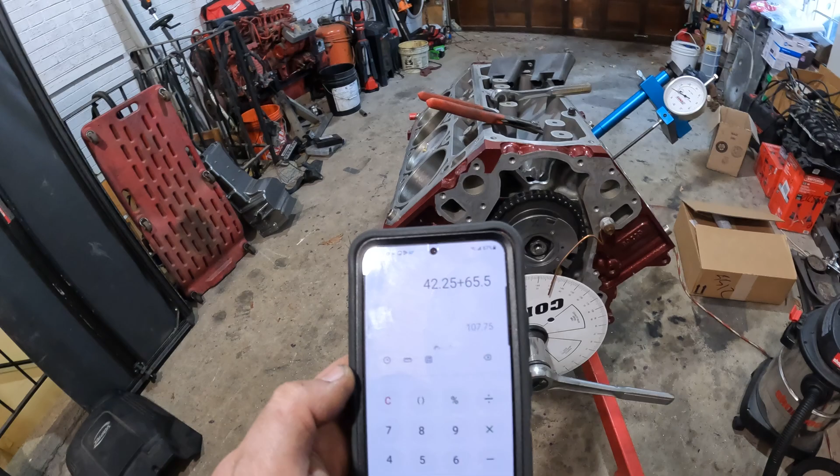So then take 150 minus 65 and a half, and that will get you a difference of 84 and a half degrees. Take 84 and a half, divide that by 2, and then add it to your lesser number, your 65 and a half. So that got us right here. We're clocked in at 107.75, 107 and a half, somewhere in that area. Our cam card tells us that we should be at 107. So less than a degree, I'm not going to worry about that.

I'm not going to cry about that. There's no adjusting that we're going to do anywhere on that. If you're way off, you may want to verify that you do have this locked on the pin correctly, that you do have your dots lined up. If you're getting numbers that are really out there, maybe you didn't get your dots lined up, your tooth off, something like that. If you're pretty close, like I am with this, I'm gonna leave it be.

If for some reason, say you're 3 to 6 degrees or something off, maybe there was an issue in the grind of your cam, it was off, you can, even with the VVT stuff to help get you set up, why I wanted to check this was you can get crank gears that have offset keyways in them to move your cam timing back and forth. So luckily for me, I can leave the one that's on there on it and go for it.

But like I said, even with VVT, to get your intake center line, your base timing right, you can still mess with that. You'll just have to change it with the crank gear, like you would with an adjustable aftermarket set or whatever. They do make them for the single rows, so that's just what you would have to do. Luckily, we don't have to do that. So now that I'm good with that, we're gonna move on.

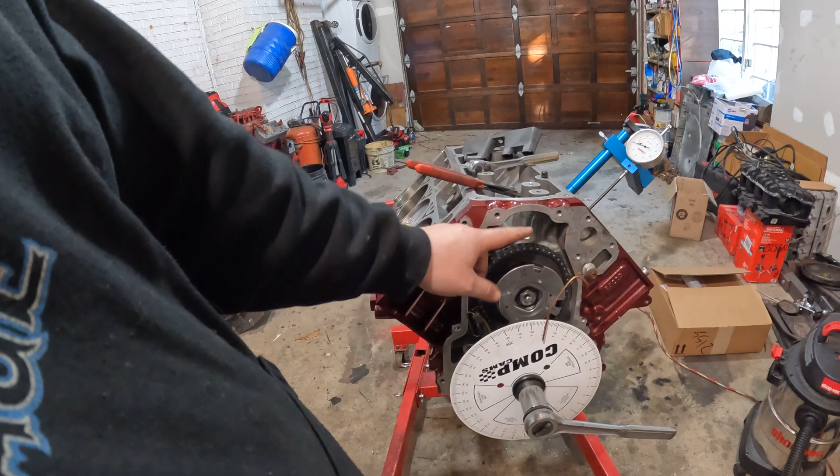So as you add oil via your little valve here in your bolt, when you pulse that solenoid, you're changing that valve movement and you're adding or subtracting how much oil flow makes it into that cam phaser. This cam phaser leaks a little bit. That's why they have a little bit higher volume pump to begin with, because obviously it has to bleed some of the oil through it so it can maintain what it's commanding.

Another little thing that I did here that you can do with this, it takes you a minute. It's kind of hard since this is an aluminum block. Some of the engines, you can use your magnet base dial indicator and just swivel it. Since this is aluminum, the magnet doesn't stick to it. As I check my piston protrusion, we're right at 4 or 5 thousandths out of the block, out of the deck, which is right about where stock spec was.

We need that to make sure we calculate our compression ratio correctly, because if your piston's in the hole, you're going to have less compression. If it's out of the hole, you're going to have more. So calculating your compression properly is good to know. I had the heads milled, and this cam's pretty small in most people's eyes. So even though I had the heads milled, this cam's pretty dinky.

I'm not too worried about exhaust clearance when the cam goes into retard, but I do want to make sure that I have enough piston to valve clearance both ways. So we'll put some Play-Doh on a piston and put a head on here in a little bit and show you how we're going to check that. Before we move on, I'm going to show you one other little tidbit here.

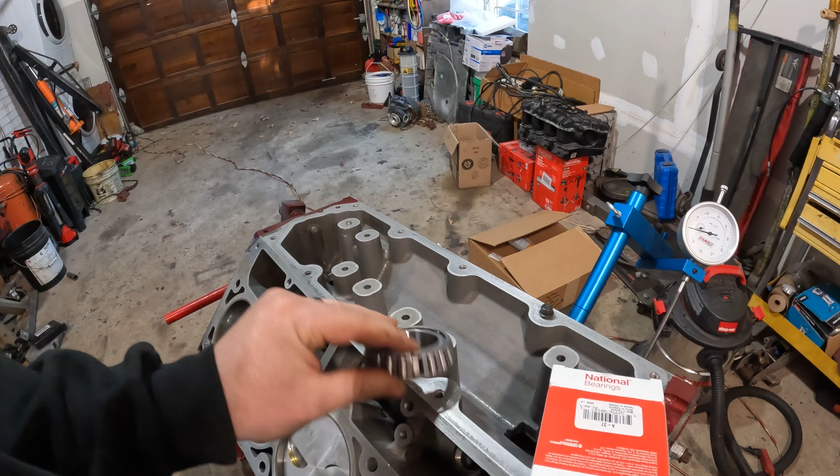So you're kind of wondering why I have this tapered roller bearing. Well, here is the roller out of it. And it just so happens that fits nicely in these AFM holes. The part number on this is simple. It's an A-37 National bearing. So if you snip the cage, pull the rollers out, they fit nice and tight in your, so sorry about that.

Anyway, the rollers have a taper on them, obviously to match the contour of the inner and the outer race that the bearing's on. So there's a slight taper on these. They fit perfect down in the hole. You can see they're sticking up a little bit. So you take a hammer and just tap them down nice and flush.

And that's what we're gonna do to block all these holes up. No need to spend, I don't know what they are, for one of the block kits with like a rivet or whatever. This bearing I think is something like 10 bucks, 12 bucks, something like that. There's enough rollers in there to at least do 2 engines. So nice and easy, they won't come out.

Reason I'm doing that, this thing does have a non-AFM valley plate that I'm gonna be using, but if you look at those, they seal with an O-ring. So rather than solely relying on the O-ring to keep your oil around your lifter, to me this is the best way to ensure that you're not going to have any leaks. They shouldn't leak, but over time the O-rings dry up, they flatten out, whatever, and then this will start seeping some oil.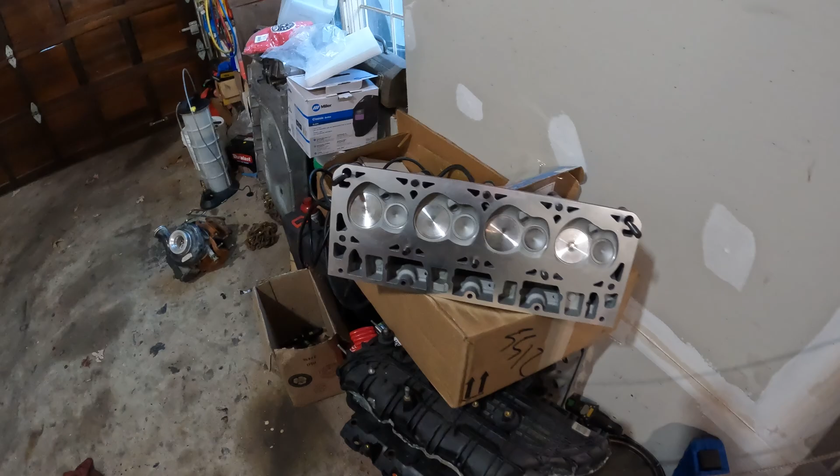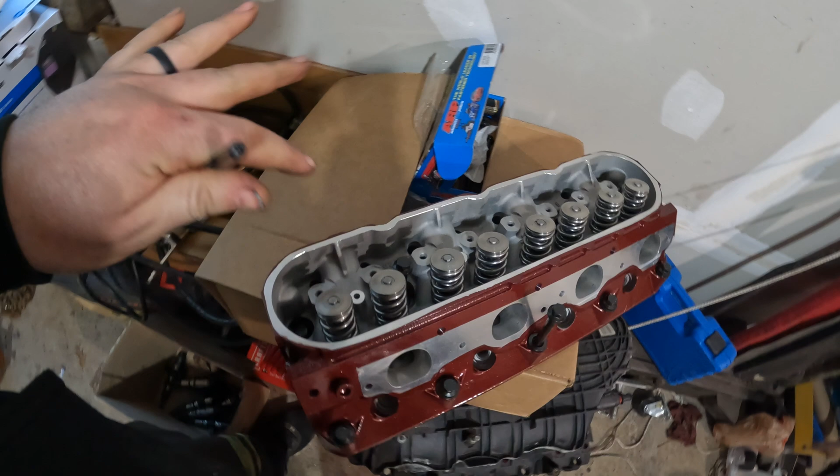So what you're going to do, you're going to obviously get your cam in, get your lifters, your trays, all that. Have your head on here. I already had it on. I've taken it back off. So pop that down through your push rod hole in your head. I got the head sitting up over here. So you got your push rod holes on this side. You set your push rod in, you put it in like so. It is a royal pain, at least with this tool, to get the adjustment set up right, because it kind of likes to spin the whole push rod instead of unthread itself. And you're trying to get your fingers in around the rocker arm in here to adjust it. So it takes some trial and error. Anyway, the length I came up with was about 7.340 is what this adjusts out to on the base of the cam.

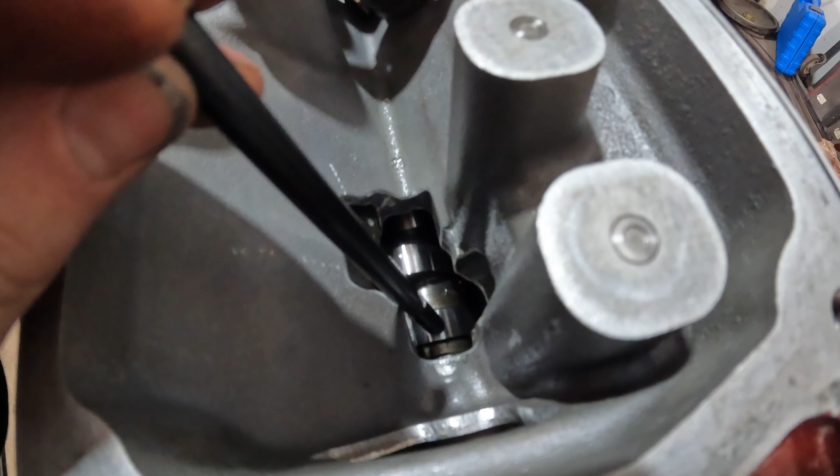So just FYI, if you've never checked your push rod length, you have your lobe where the lifter rides up, and then you have what they call the base circle, which is where there is no lift or there's no lobe. So it's easy to see with the lifter valley off in here at the moment. You can see there's a lobe up right here. This is what you would refer to as the base circle of the cam. Top of the lobe, base circle. So you'll roll it over, you'll see where your base circle is, and make sure that both the lifters are down and seated on the base of the cam. And you will run this out and adjust it and pull it out, measure, and you will get a length. And then, in my case, these Morel lifters seem to want about 50 to 60 thousandths preload. I've seen some stuff back and forth.

Anyway, I was measuring about 7.340 plus or minus a couple thousandths from intake to exhaust. They were all pretty consistent. I didn't check every hole, but I did check both of them on one, and I kind of went around and checked a few others. But anyway, about 7.340 plus or minus a couple thousandths. So the push rods that I bought were actually marked as 7.375, but actual measured length is about 7.390, 7.391. So that gets me right at 50 thousandths, sometimes down to about 48 thousandths lifter preload. So we're gonna go with those.

If by chance I'm getting noisy startups, or if I feel like I'm getting some lifter tick, I'll go up to a set of 7.400s just to get it a little more preload and see if that helps it. But we're within the measured what Morel tells you to use, so I'm pretty close. We should be all right.

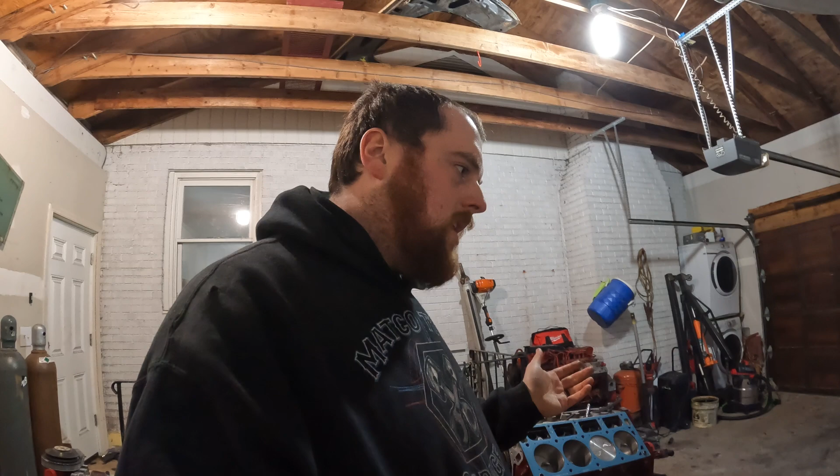So anyway, that's that. So once I determined that my lifter preload and my push rods were going to be correct, then we moved on to doing piston to valve. Now, how I did piston to valve, there's going to be people telling me I did it the wrong way or this or that. This is just how I did it. So I don't have a set of checker springs right now, and I do have the stuff, but I didn't feel like taking these heads apart. So these already are set up with my dual springs.

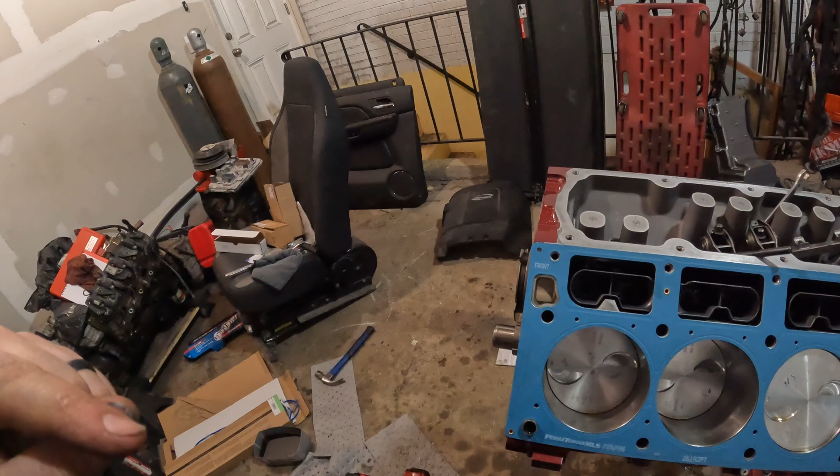If you pick the rocker up and bottom the lifter out, you could just kind of tap this up in under the valve. Now I know there's gonna be people telling me that messed up rocker arm geometry and this and that. It's close enough for what we're trying to do to get a number. So I put the head on. I did not fully torque it because obviously I don't want to compress my head gaskets completely. So I put it on and just buzzed them down to about 25, 30 foot-pounds. And that was enough that the head gasket was kind of squished, but not to where I can't use it.

So put all the bolts in, snug the head down. Before I did that, I just went and got myself some Play-Doh. Some people will say you have to use modeling clay, whatever. It works. It's 50 cents for a thing of Play-Doh. So pop Play-Doh on the piston right here, because this is where your valves are going to be coming in contact. Then simply roll the engine over one valve at a time with your little shim in there, so you have your lifter bottomed and you actually get full valve movement on the lobe of the cam. And rolled it over and did that for intake and exhaust.

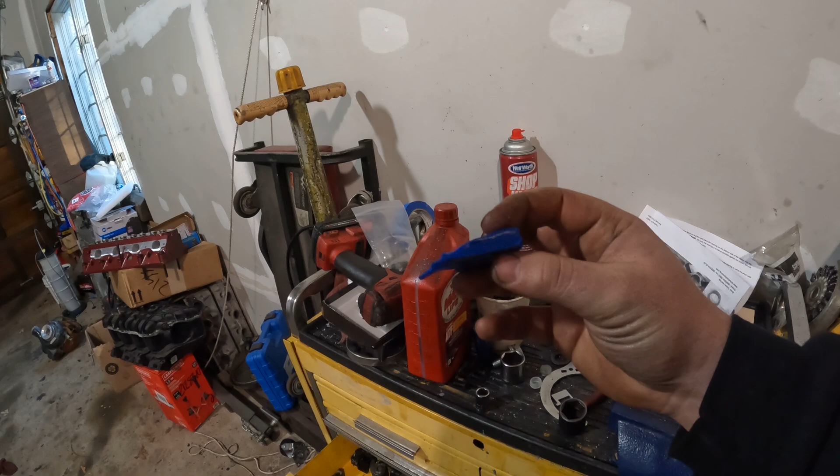And on the flip side, if you look here, you see the little indent for the valve relief in the piston. Our closest point is right about here, and I had 220 or something. I had a lot of room on the exhaust. But that's about how deep that valve relief is. So if you didn't have a valve relief, you'd be getting really, really close. That's why you have to use this kind of piston when you're doing variable cam timing.

So anyway, I have tons of piston and valve clearance, and my push rods are good. So we're ready to just put everything else back together. All the hard work's been done. The only thing else that we're gonna have to do any kind of measuring or thinking about is driving our front and rear main seals in, putting the oil pump on, stuff like that. But I'm still gonna go over all that.

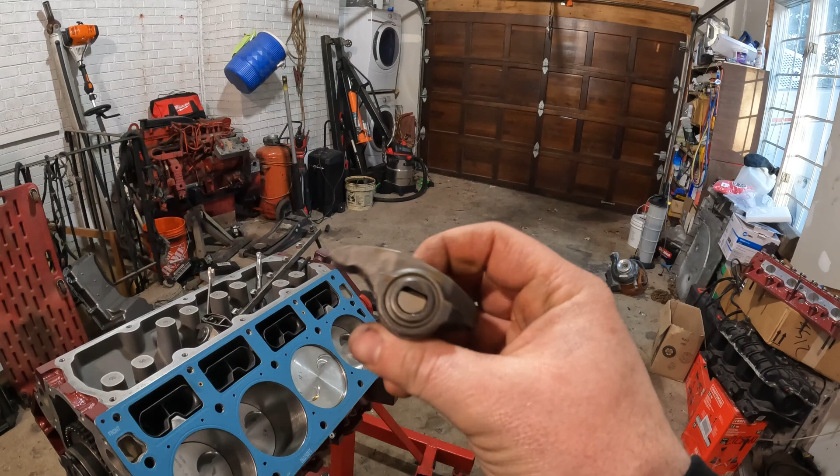I gotta get my plug drove in the front of the block here. I got a soft plug kit, so we'll have to drive that in. I can get the oil pump on, get it shimmed and spaced correctly so we don't have any oil pump binding. And then put the heads on, torque them, and I have to finish doing my rocker trunnions, because I did get a BTR rocker trunnion kit because the stock trunnions kind of suck on these things. They limit your valve train movement. If you see right there, you see how that center bar will limit your lift.

And if you do a little bit of researching, you'll know that these things are kind of known for coming apart at times and sending needle bearings through the engine. So put the BTR kit in there with a little snap ring. Yes, there's still needle bearings, but there's literally no way for them to escape. And also, there is no limitation to movement other than when the rocker arm bolt hits the rocker itself, which is going to be way more lift than anybody is going to be thinking about running with a stock style rocker arm, or I don't even know how much it would be, but it'd be a lot.

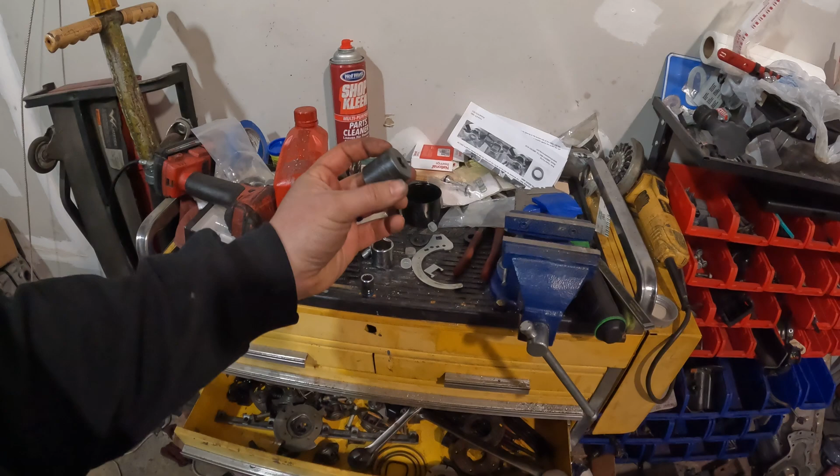So I got to finish doing all of these. That's pretty easy. The instruction from BTR will tell you how to take them apart and do all that. How I've been doing it is with this socket and this socket. Use the small one as a die to press that out and into the big one. So you will squeeze it together like that in the vise, and it will shove those out. They pop out. And then BTR sends you a couple of these washers that is the right size to slip over the trunnion bar in the center.

And when you squeeze it together in your vise or press or whatever, it will put the bearings in flush to the side of the rocker arm. You put your snap rings on, bam, you're done. Really not that difficult. Takes a little bit of time, but it's pretty easy. So that's one of the other big things: if you're doing a cam kit, spend the $100 or so and do your rocker trunnions.

I was kind of dumb and I didn't watch the kit that I bought. And if you'll notice, there's no rocker arm bolts in there. So that was my bad because I didn't pay attention to which one I ordered. I just seen the trunnion kit and ordered it, and I ordered the one that doesn't come with rocker arm bolts. And I personally don't trust these stock ones for any kind of decent camshaft, unless you got just a small low lift truck cam. I personally don't trust these to not snap and break off in the head, especially if they've been reused once or twice.

So I have ordered a set of BTR's bolts that goes with that trunnion kit. So that's my bad. Make sure you pay attention to which kit that you're ordering and get the one with the bolts and save yourself the hassle. But so yeah, we're gonna probably go ahead and bolt the heads on and torque them, and then I'll work on the oil pump, putting the covers on and all that. And we're gonna have a long block and be ready to go. So enough rambling, and let's do a little bit of time lapse and maybe torquing these heads.

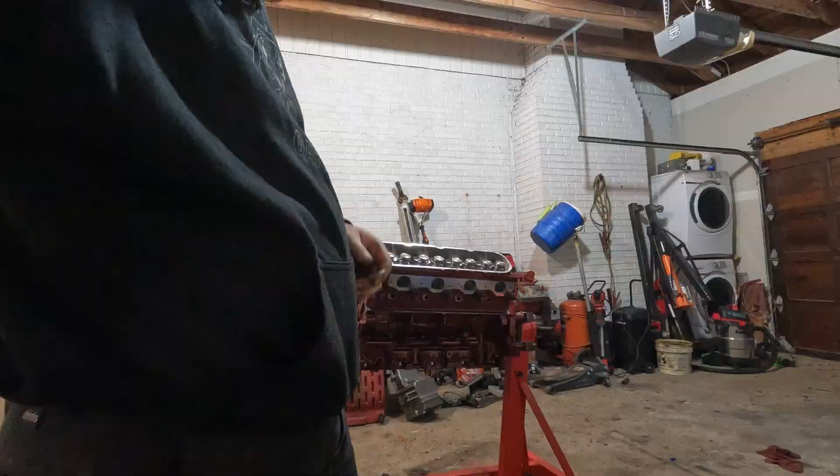Anyway, so heads are on and torqued, all up to ARP spec. Just a little note, most of you may know this, I don't know, but ARP tells you that you have to use their Ultra Torque assembly lube. When you use their Ultra Torque lube, it is slicker than, say, engine oil or something like that. I had to use these. I swear I have one of the tubs with a brush around here somewhere. Can't find it.

There's head bolt part number 2. In the instructions, they tell you to make sure that you lube the underside of the bolt head, not the back side of the washer. So the surface that should be lubricated is the surface between the head bolt and the washer. And you should also put a nice bit on the threads and kind of smear it so you have good coverage as you run the bolt into the block. You want the threads lubricated, you want the underside of the bolt lubricated.

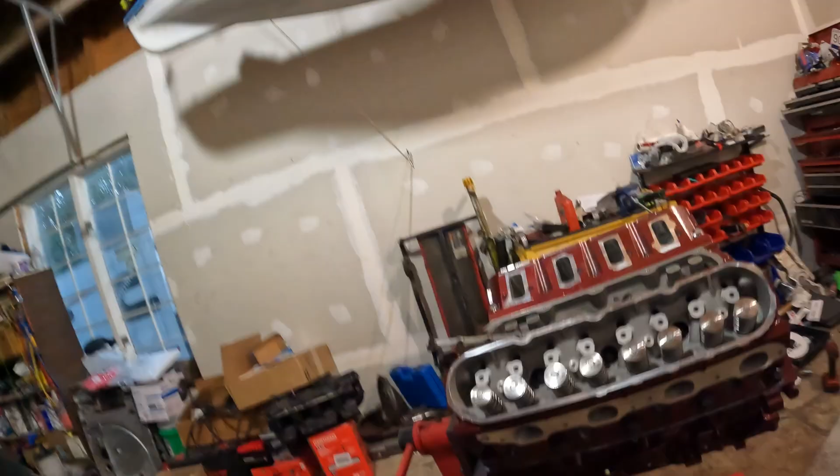They tell you that they don't want the underside of the washer against the head lubricated also, because they say it creates a bearing-like surface and your torque readings will be inaccurate. You will actually have stretched the bolt too far. That's what they say. They're smarter than I am when it comes to fasteners. They build them, they know about them. So just make sure that you don't just cover the washer, because most of your friction is actually under the heads, not necessarily on the threads.

Yes, there is friction on the threads, but I've been told from places like that that there's actually more friction going on the surface underneath the head of the bolt or the nut rather than on the threads. So if you make that bearing-like surface, you will stretch that bolt and turn it further in because of that. So just a little note, that's what they tell you that you need to follow.

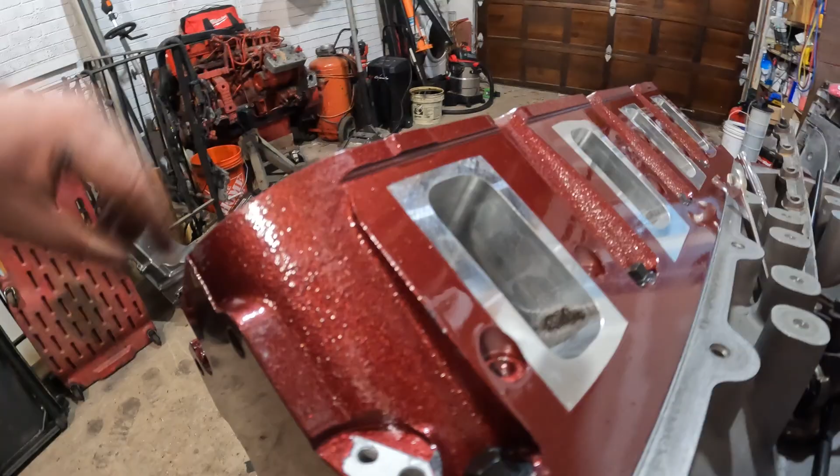So the heads are on and torqued. I'm going to probably pop the valley cover on real quick and get all that stuff out of there. If you port your own heads or you get somebody to port your heads, make sure that you see the light through that hole. That's your intake rocker bolt. Make sure you put some thread sealant on that when you put those in. Every single one of these pokes through. That's just how virtually any of your porters, especially on these rectangle ports, are going to do it. You can actually kind of see it right there. You can kind of see the edges of the threads.

Every port, there's a bump in there from the factory, and when they port them, they cut that bump out, and then you're left with that exposed hole. If you don't seal that hole with the threads in the bolt when you put that bolt in, it will suck oil, because remember, this port's under vacuum most of the time, unless all you do is drive wide open, and nobody can do that completely. So you're gonna have vacuum in here, and it's gonna suck oil around the threads of that bolt, and you're gonna have an oil burning issue. So just make sure you seal those up.

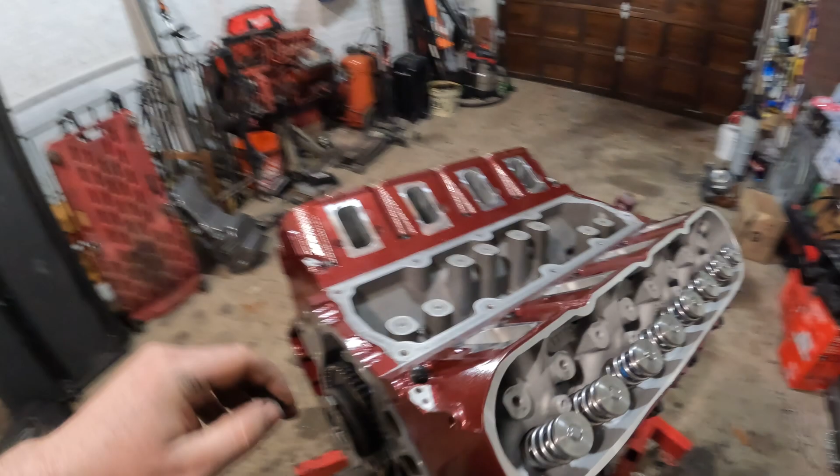All right, so I'm going to put my valley cover on. Just thought I'd give you another little bit of information why I personally think it's important that you drive some plugs in here. I showed you the cheap bearing and how to do that. So this right here is one of the little O-ring seals that goes in that valley cover. This thing is stiff as a board, and you see how this thing's all flattened out. That's not going to seal. I can't squeeze that thing. I can't do anything with it.

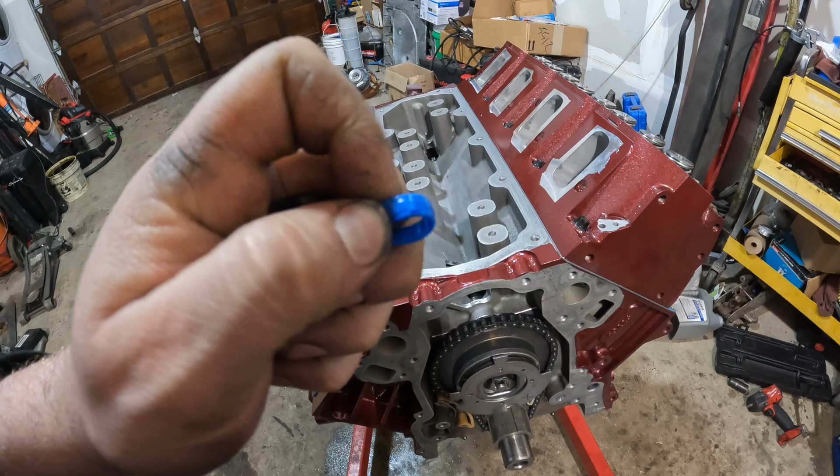And this is your replacement, and you can see it wants to move nice and soft, but eventually that's going to dry out over time. So that's why I personally feel you should mechanically plug these with a steel slug or whatever, like that bearing roller. So when these eventually dry out, it helps you maintain your oil pressure. I'm still going to put these in. Technically, you probably don't need them since these are plugged, but just put them in anyway. They're in your gasket kit. So just another little bit of information.